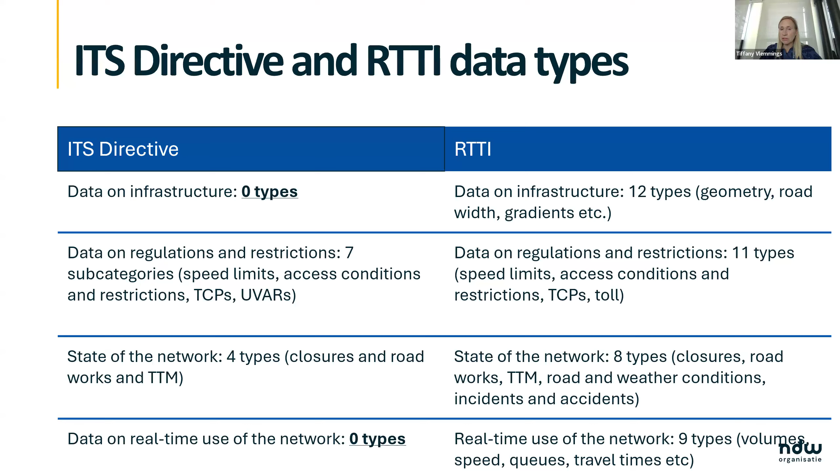Also, the entry into force dates differ. Sometimes something has to be available by 2025, sometimes 2027, sometimes 2028, or even later. And the requirements themselves differ - we talk about creation of data versus access to data, which are really two different things. In general, I would say the delegated regulations include more data types and concern a larger geographical scope than the ITS directive, but the requirements are easier - they're not about creating data, but about publishing data.

So this is the legislative framework, I would say, and I think the next presentation will be about deployment and how to do that. But I really want to thank POLIS in this, because if you look at the legislative framework, there's no mention of what a traffic circulation plan actually is. It's only a name - it doesn't say what it has to include or how you have to organize or standardize it. So there's a whole lot of work still to be done to make sure that we, as road authorities, have a standard for digitalizing our traffic circulation plans and mandating private service providers to use one.

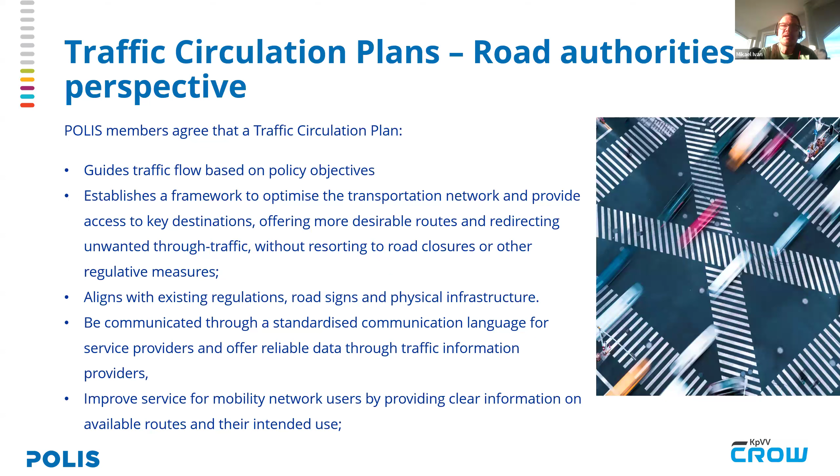However, as you realize, there are some challenges when it comes to implementing traffic circulation plans. One very important fundamental challenge is the limited awareness and accessibility of traffic circulation plans. There are conflicts between optimal individual choices versus overall societal policy goals. There is also complexity at multiple levels, especially if there are many road authorities involved, from the local road authority to regional to national.

And what is obvious, there is a lack of standardization. It's also important to integrate with navigation services in order to make this happen. We believe that TCPs are a fundamental and important data type for the future, where we will have a more automated digital transportation system.

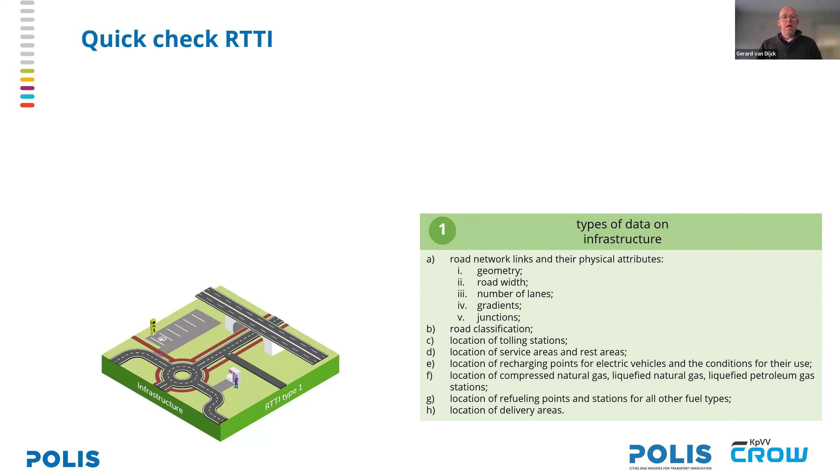If we put one layer on top of that, then we come to the traffic regulations, and that's where we actually find the traffic circulation plans. It's data item 2B, meaning it's not the data types that are in 3A, mostly the traffic signs, because it's very strongly related to one another, like Mikael already pointed out. But we don't have a need to push this data twice. So if we put the road sign data into the data items that are in 3A, then we need to figure out what to put in 2B on traffic circulation plans.

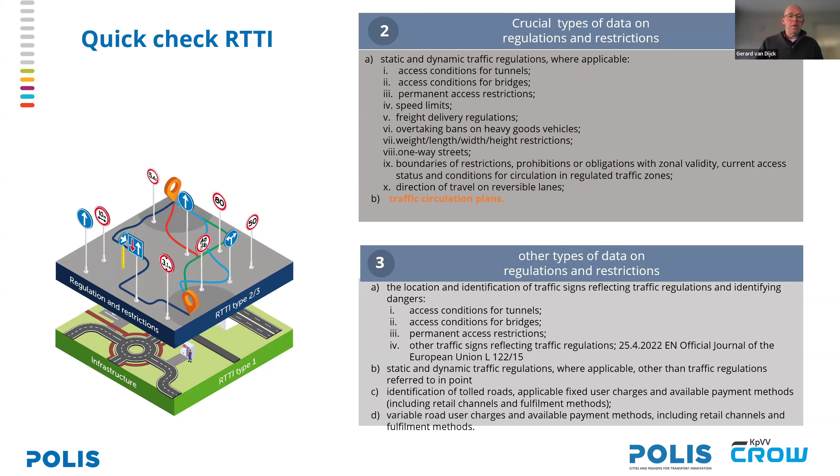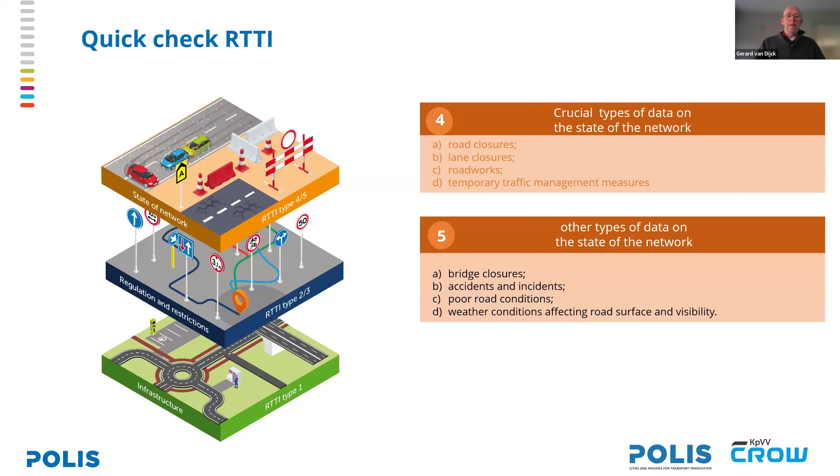One layer further, please, Laura. When we come to the state of the network, all kinds of temporary data can be pushed along, situations that occur on the network like roadworks, but also bad weather conditions and that kind of stuff. The last layer, the fourth layer on the RTTI, is about the actual use of the network, like traffic volume, traffic speed, travel times, and that kind of data. So I think this picture makes it very clear how the RTTI is actually built up and in which layer we are trying to modify these traffic circulation plans.

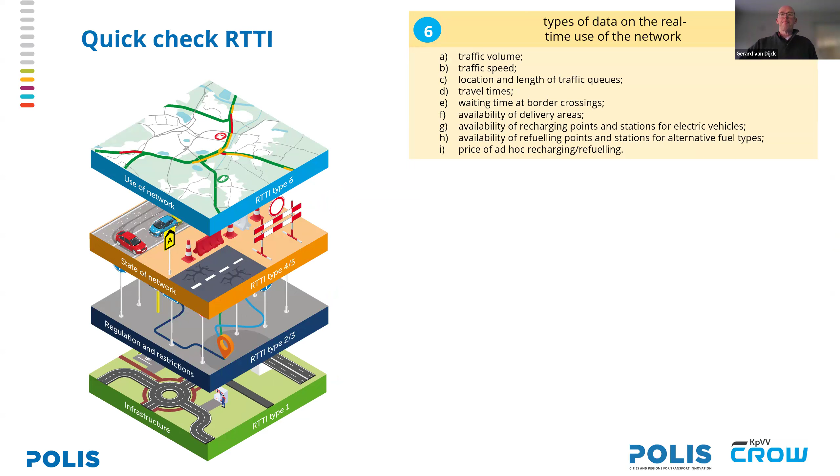Let's go to our stepping model. We find it important to start this process with small steps at a time, because if we want too much to start with, we may end up with nothing. I think it's very important that we try to have a common base in Europe, because if every country, region, or even every city would digitalize the traffic circulation plan in their own way, then we can be pretty sure that service providers won't be able to use it, or won't use it in the end.

So the first step is to fill your data on your road classification. Road classification is something else than your traffic circulation plan, but of course it's related in a certain way. For instance, a very wide road should not have a particularly low function in the end. So it's not necessary, but good, to have your data on road classification, so you're aware of what roads are available, and not only for yourself but also for the reuse of service providers.

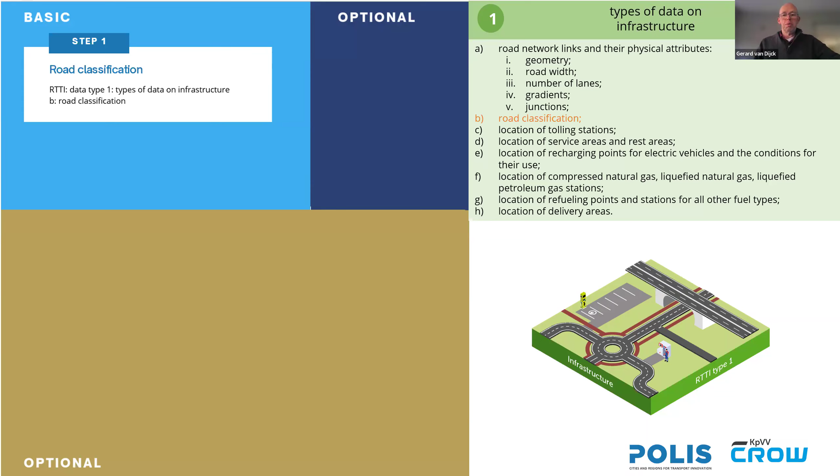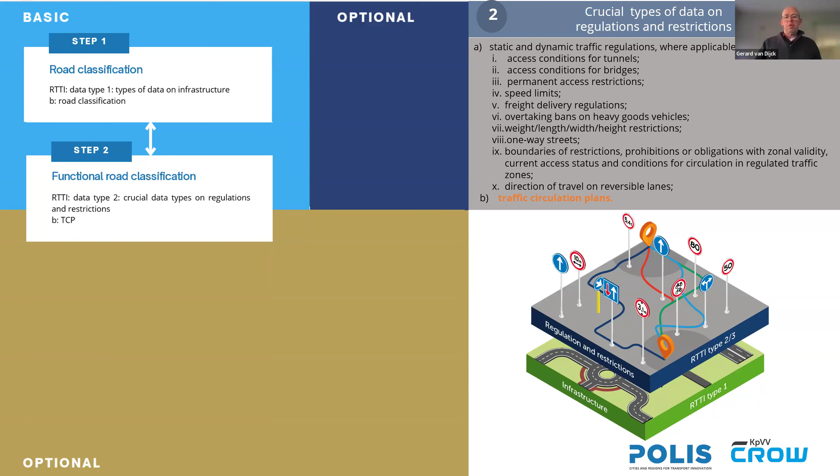Then we can go from there to the next step, and then we come to the functions. There we want to use the functional road classification as we already know it for many years in the Inspire dataset, coming from OpenLR, which is also very familiar for service providers. So that's where we're trying to put the function of the road.

So if we go one slide further, please Laura, we see that we're once again not acting on the road signs, but purely on the road functionality. We are currently in a situation where service providers each have their own road functionality that they made by themselves. And now we have the chance, like Tiffany already explained, that the reuse of this data became mandatory a couple of years ago.

Now we have the chance to put these policy indicators more into the route choice than before. So it actually pays off to put effort into this and make sure we get our road functionalities as a basis into this data. That's an important step in the process, getting our road functionalities available for reuse by service providers. If we have that, we have to experience if that is enough, and we can imagine we need some local additions to fine-tune the whole system.

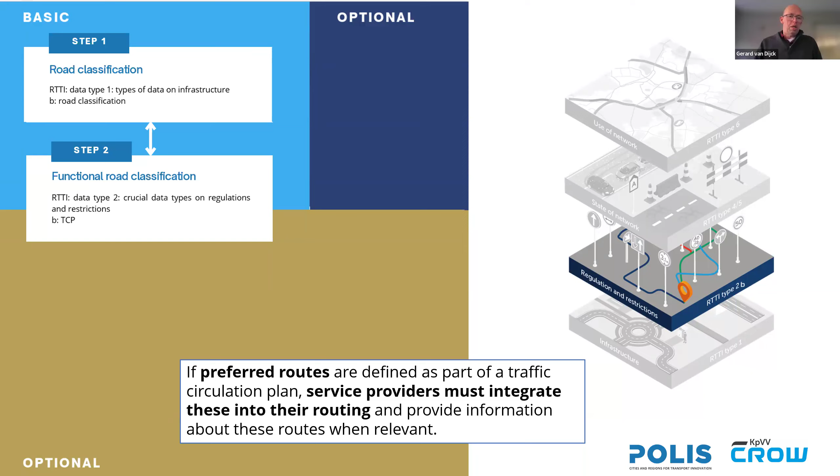That's why we came up with the first three use cases to more and more fine-tune this. In the future there may be more use cases, but the first ones we can think of is, for instance, avoiding routes or certain areas.

For instance, if you have a city with two roads that go around or through it, they may have the same function—the green road is actually more for through traffic, but the red road is collecting traffic out of the city. That may come up with the same functionality in the FRC, but from a policy point of view you want through traffic not to use the red route. So what we can do is set up avoidance points in the data so that through traffic avoids the red route and uses the green route, even though they have the same function. That's an example on the city itself.

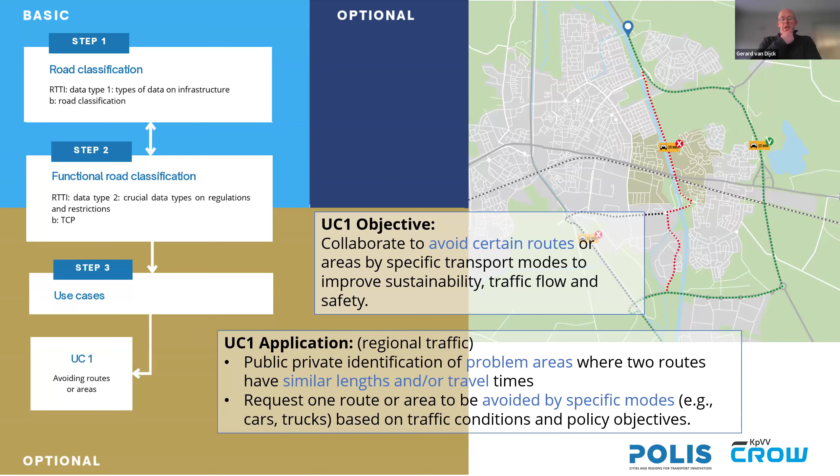This use case can also be used more locally. For instance, if you have a school zone, during the time school starts and ends, you can ask service providers to avoid the red route and use the green route. But this can be dynamic, because during our six weeks summer holiday, it makes no sense to navigate around the school when it's an empty building. So this is more or less a dynamic example of use case one.

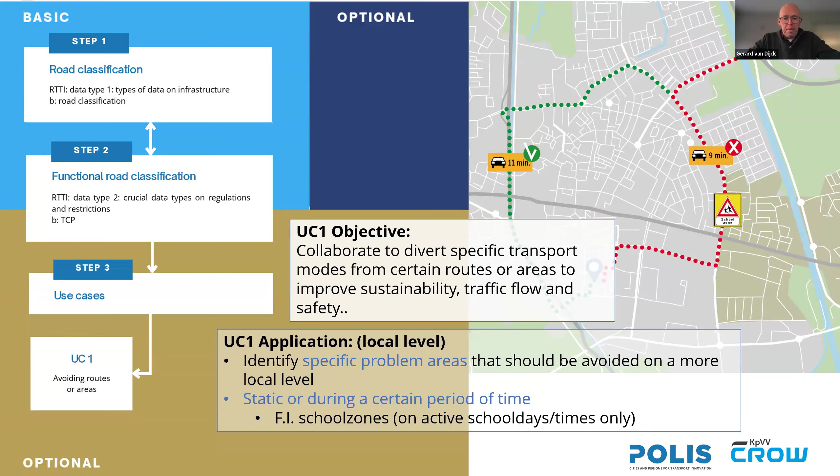Then we can go to use case two. Use case two is based on keeping traffic on the main routes, even if we have some congestion. Of course there will be exceptions, because if your original destination is on local roads, your navigation will have to take you there. But as long as you're through traffic, we try to keep you as long as possible on the main roads. So that can be a use case to set up, once again, avoidance points in your data when it gets crowded on the main roads, especially in areas where there isn't much availability of local roads, or where those local roads are getting too crowded at that time.

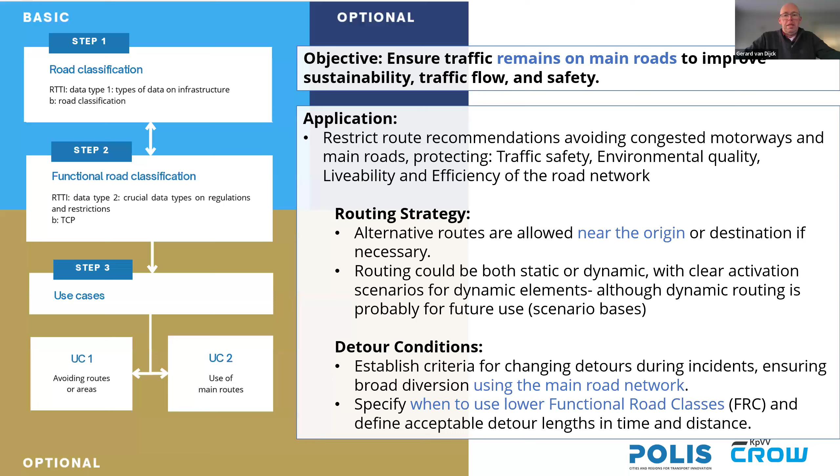The third and last use case is a bit more into the future, but let me explain it this way. We start to put up the traffic circulation plan from a car perspective, and there's a good reason for that, because most car drivers are actually using navigation systems. Pedestrians and bikers use way less navigation, and public transport of course isn't even using that. So it makes sense to start with car navigation, but over a certain period of time we can create more and more multimodality to this.

In the multimodal way, you can try to separate the different modes that you have—preferred routes for cyclists, for public transport, and for car traffic, or even logistics or transportation.

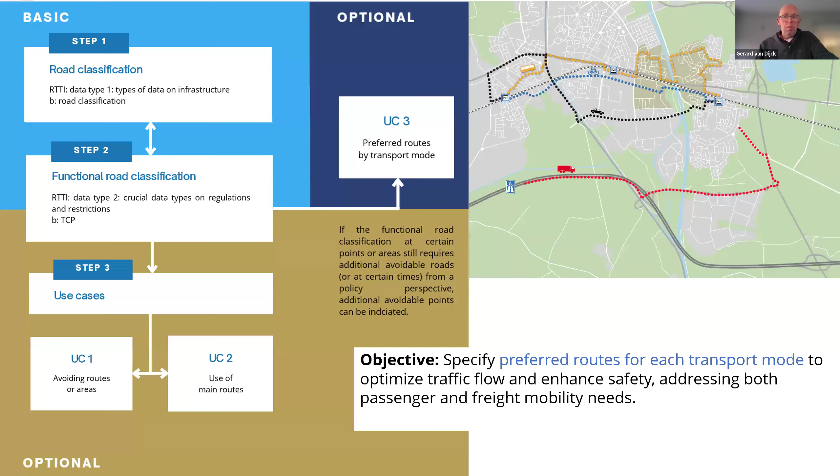Separating these traffic flows can relate to more efficiency and safety. They can be based on desired vehicle usage, but also on the actual use of a certain route. For instance, if you have a route that is very often used by cyclists, it may not be very practical from a policy point of view to think of another route. Instead, that route that's used very often could be prioritized even more with traffic lights to make it better—that becomes the main road where you collect cycle traffic in that local area, of course, not the whole city.

So this is a bit more for the future, because what we do now, these functionalities in step two, are actually based on car traffic. But in the end we'll have to find a way to make these classifications more and more multimodal, to get the whole multimodal policy into this traffic circulation plan.

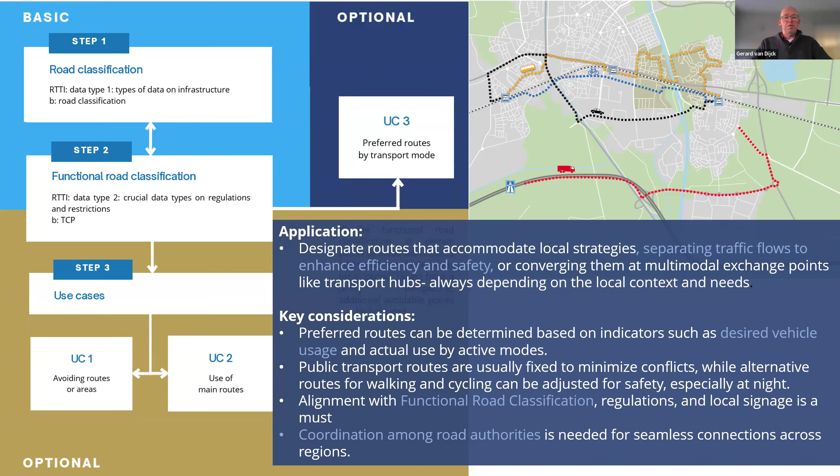Thanks, Gerard, for mentioning me. I'm Luc Misdom, working for the city of Helmond, and I think we can all agree with Michael and Gerard that is a fine approach, but still really theoretical.

We always know the proof of the pudding is in the eating. So this is our first attempt from Helmond, and I think these pictures being shown now are quite similar to what we all have.

We made a certain classification with roads, starting with highways, the black one, and then we go down step by step for more regional or interurban connections, which is red. Then we have the orange, the ring road, then the blue ones, leading towards the ring road from more neighboring cities or villages.

In the end, the green ones - the yellow ones we haven't used - and in the end, all the other roads are white. We have 7 classes now in the Netherlands, or at least in the area where we are located. You can think of more. This is also only for cars; you can think of a multimodal approach as well.

I think it's a weird term that's being used - I tried to translate this from Dutch to English, and we can argue on the translation, but in there itself is one of the main challenges. Because do we mean the same with what's a local distribution road, etc.?

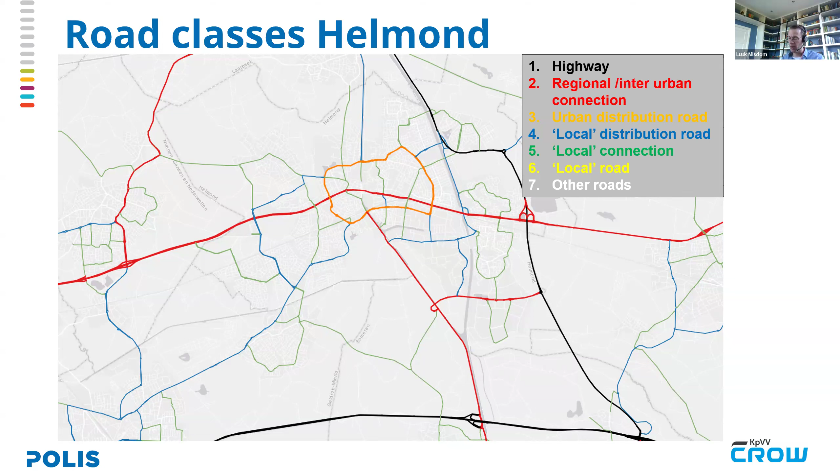But for the functional road class 1, the major roads less important than motorways, wasn't something we thought of in the Netherlands. And what we can or should do in the Netherlands is add a new road classification for us, like maybe the minor highways or the regional interurban connections, but with a national relevance, and go down step by step.

But by going further down, it becomes more and more difficult to align what we have in the Netherlands with Inspire, especially when you come to FRC 5, the local roads of high importance, which could quite easily be the local connections we have, which were green in the picture we showed earlier, and also the ones in yellow, the local roads.

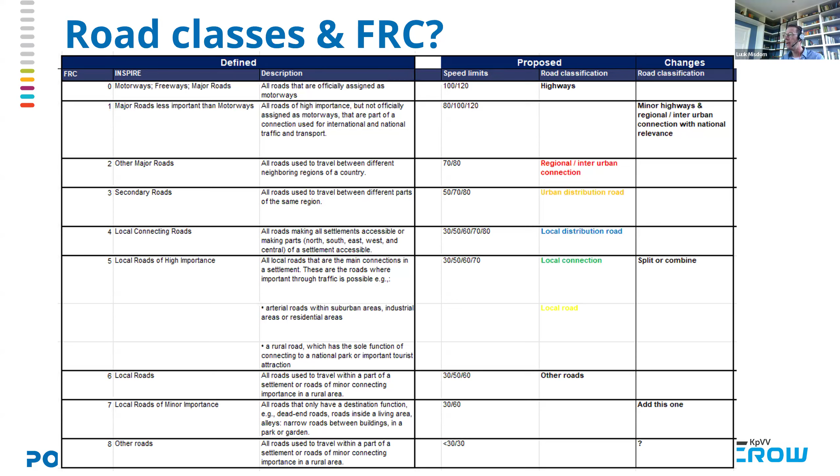Next slide, Laura. But still, we will try to do this. We want to try to make a translation table on a national level. It's a working group also run by Gerard, to be honest.

Can we come up with some definitions? How can we use this in the Netherlands, and hopefully come up with a new national standard, so we don't have to come up with all new traffic circulation plans, etc., but just by making one translation that can be made available to service providers and on our national access point.

And my challenge for you, or my invitation to you on a European level: please try to do the same. In other cities and countries, come up with your own translation table as well and compare the proposals we made. Because it would be really weird if in Gothenburg it would be something completely different than what we came up with, because the end goal should be that we have some more harmonized road classes for our TCP.

And I think we will have to make some attempts to get there. Hopefully this webinar can be a start for all of you to start up these actions. And then I will give over to Laura.

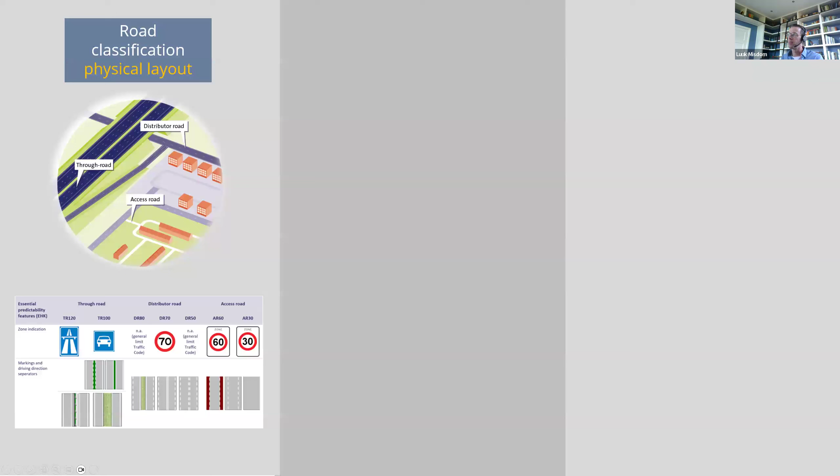Gerard, we have here just one more slide that summarizes exactly what had been said, going from the physical layout of the road classification to the function of the road, which is highly dependent on the policy, and then the work is now to be done on how to go from the different national policy function tables to the harmonized one like INSPIRE.